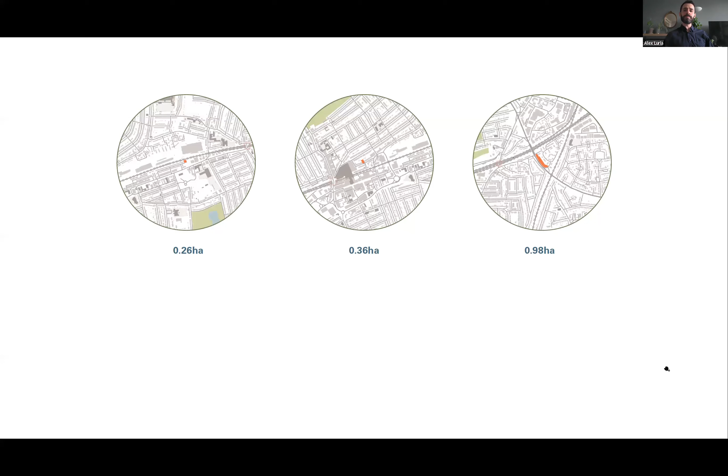So the next step was for us to identify 3 sites representative of the smallest scale, the medium scale, and the largest scale, and see what those sites could actually deliver. So we identified those sites, and then we worked up 3 examples as if they were real build projects.

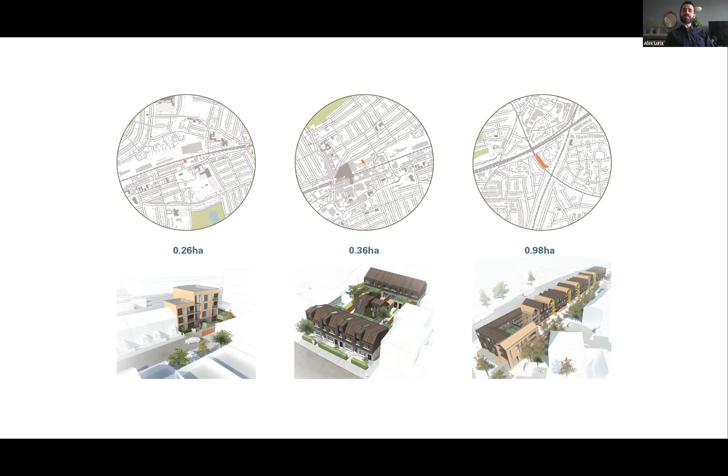With 3 different typologies to respond to the context: one flatted infill site, one which was back-to-back housing or terraced housing, and then another on the larger site - we're talking almost a hectare here, so not a small site - for again flatted development, but in a different format. And comparing that to what the Brownfield register, the site allocations, and the permission in principle would deliver on those sites.

So we're starting to see that actually the permission in principle isn't really relevant, because we can already start to break that limit on any of these sites. And when we get up to the larger sizes, we're talking multiples of 5, 6, up to 10 achievable levels of density compared to what the government has allowed.

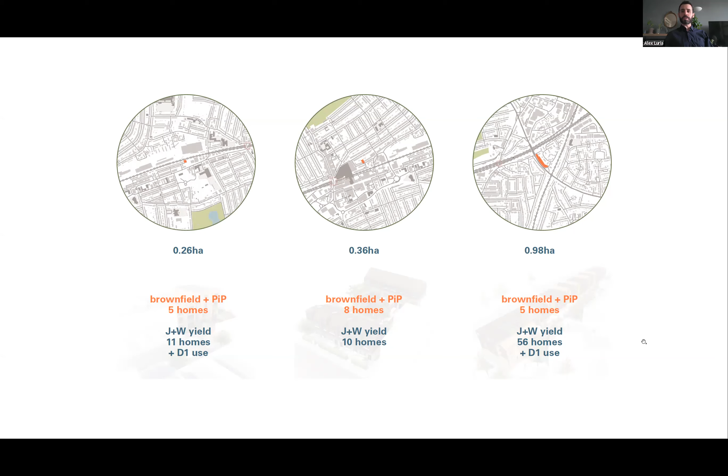What does that mean for a real world site? So the next thing I'd like to talk about is an example of a brownfield site which would have been on the register, which would have been allowable for permission in principle, and where we were able to achieve significant density increases, but in a manner which was both able to respect the scale of the context, the urban grain, the local community, and to also respect the natural environment.

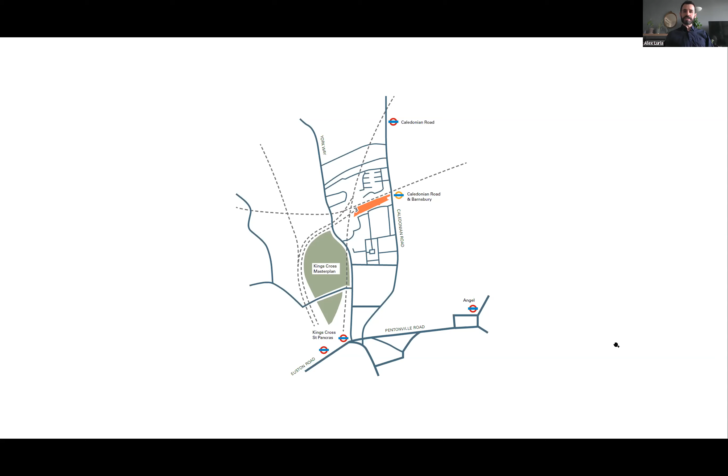So this is Caledonian Road in 2014. The site is just next to Caledonian Road and Barnsbury Station. It's just off the northeastern tip of the King's Cross Master Plan by Argent, and many of our contemporary architects have worked on that. It's the site of a former light industrial unit.

It is Brownfield Land. It was compulsory purchased by London Continental Railways to build the St Pancras Eurostar tunnel and link. So what you can see just where my mouse is hovering is that tunnel. They cut out and built the tunnel underneath this extent of the site and then filled over. So you can see here, that's the tunnel there. It buries into the site, and then the site was released and we worked on it.

So when you talk about brownfield sites, you're often talking about highly constrained sites because of their previous use. Often we have issues like existing below ground structures, contamination in the case of industrial land, overlooking to and by neighbouring development, lack of infrastructure existing and so on.

This site was no different. In fact, this was probably the most constrained site that we had ever come across. So I'll take you through a few of those. First, of course, we have the tunnel, which runs underneath the entire length of the site, the upper part of the site, at its minimum about 5 meters below the ground level.

Then we're bordering the site to the north and to the west. We have the London Overground and the King's Cross Main Line, and that's producing noises of about 75 decibels, about 2 meters from the site along this northern boundary.

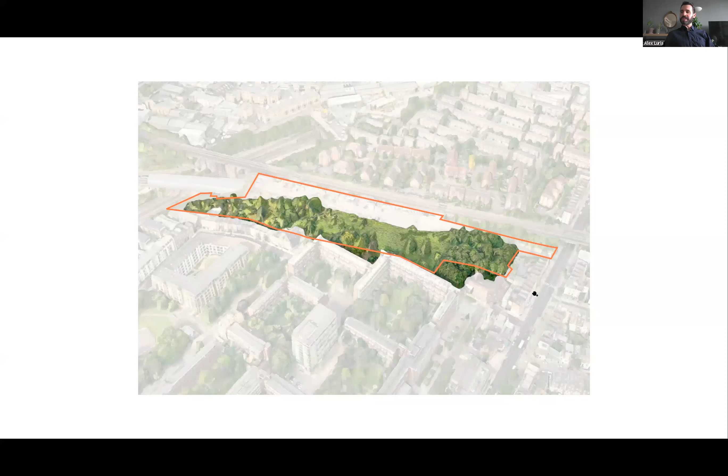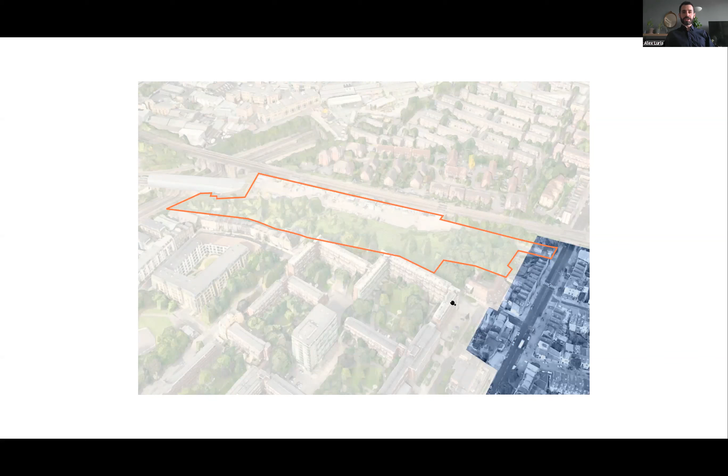A few more things. The site access - the site was completely landlocked except for one point of access from the east, Caledonian Road. We're in a conservation area. There's a river that runs underneath this part of the site, and it's also completely covered, or was also completely covered, with Japanese knotweed. So that was great.

So we have a heavily constrained site. The local authorities see this. It's both protected and infected, and we've got all kinds of existing problems with it. It's largely inaccessible. It's protected land, as I say. So they took this and they worked out a density achievable in their planning allocation of 35 dwellings per hectare. So our job is to take that and see what we can do with it.

So where we see a heavily constrained site, our job is to come up with layouts, passive design solutions, technological solutions, and building technology solutions to overcome those. Where it's largely inaccessible, our job is to open it up. Open it up not just for the people that use it, but also because that green space that we identified before, that's a community resource. Islington doesn't have much of that. Next, the protected land.

We have to find a way to sensitively develop in and around that land, but our goal was to actually achieve an overall net increase in the natural habitats and biodiversity. That's a net increase of area, not just intensifying the natural habitat. And we believed we could achieve a much higher density with those solutions.

I'll talk about how we managed to achieve that, but this is just a microcosm of how any site can be approached through the thinking of the architect and consideration of each factor. In this case, we dealt with the railway line by building a linear building along the north, carefully aligning all the primary residential spaces on the south. We were very lucky with the north-south facing site. All the ancillary and circulation spaces went to the north.

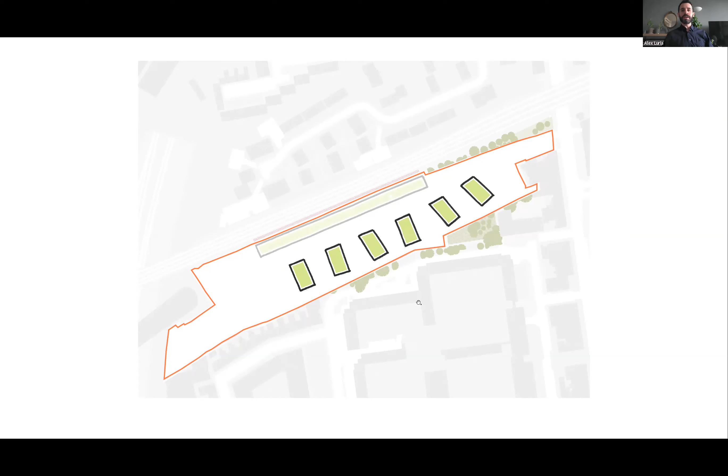By doing that, we were able to create a protective bubble of land within the site into which we could then place these pavilions. These pavilions have a compact layout and a tight footprint, and the goal of placing them into the land, partially incurring into the protected land, is that we can weave green space into and around, making sure we have little oases that are all connected, bringing even more green space to the north of the site, which was previously just tarmac. That's how we achieved an overall net increase in green space.

Secondly, by doing this, and having a scheme which is 100% dual aspect, we're creating and allowing every single home within this space to have a dual aspect view - a south facing view, and a view which penetrates through, bringing light in from the south, but also through to the site of importance for nature conservation, to that green space, to those trees.

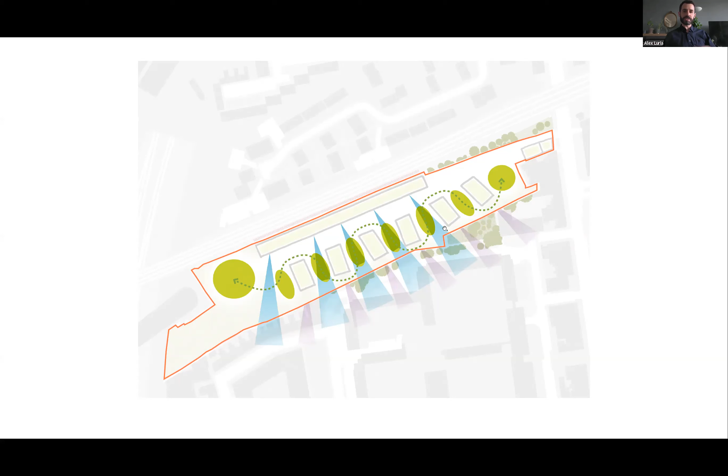And that's what we ended up with. In the end, there are a few more additions, like an end of terrace within the conservation area, and we terminated the street here so that we created, through the linear block, a very recognizable, legible urban grain.

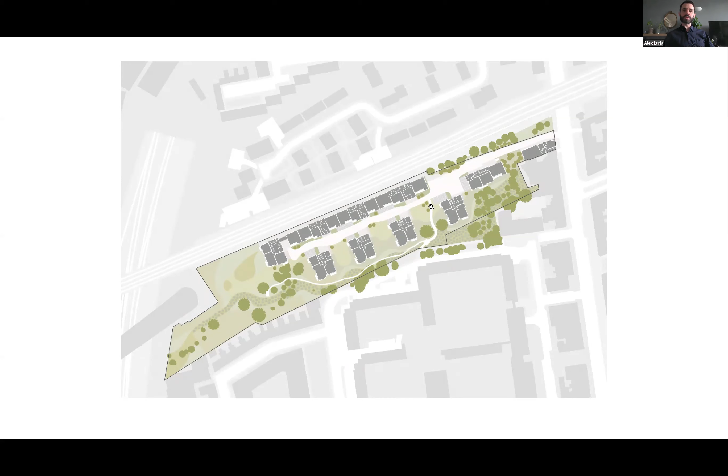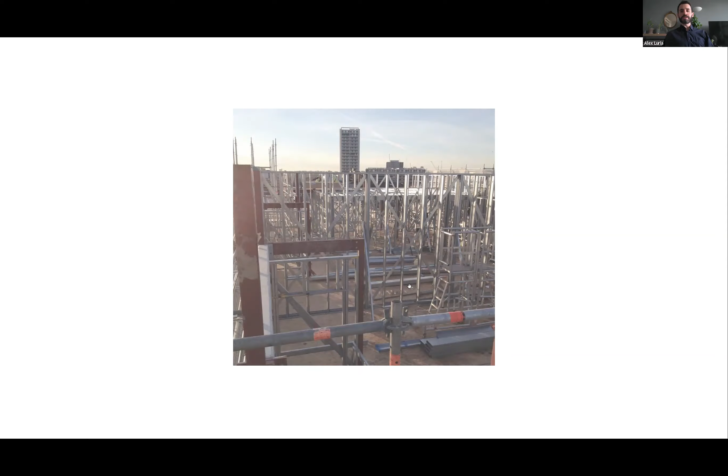The fines for doing so and putting the Eurostar out of action were astronomical. They were fined by the minute, by the way - hundreds of thousands of pounds per minute.

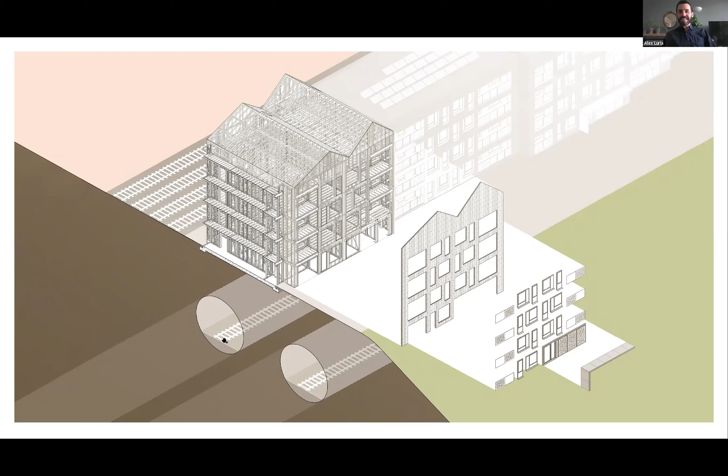So what did that leave us with? Well, it left us with a legible site, something that's amazing to be in, because when you walk down this street that's created, you keep getting these glimpses that open up and reveal light coming in from the south, but also reveal the green space we've created between the buildings.

So this is one of those gaps between buildings. We clad it partly in London stock brick, which is the local vernacular material for Islington, but also in this recycled fibre cement material called Ocoskin, which has its own lovely natural tactility but is 100% maintenance free.

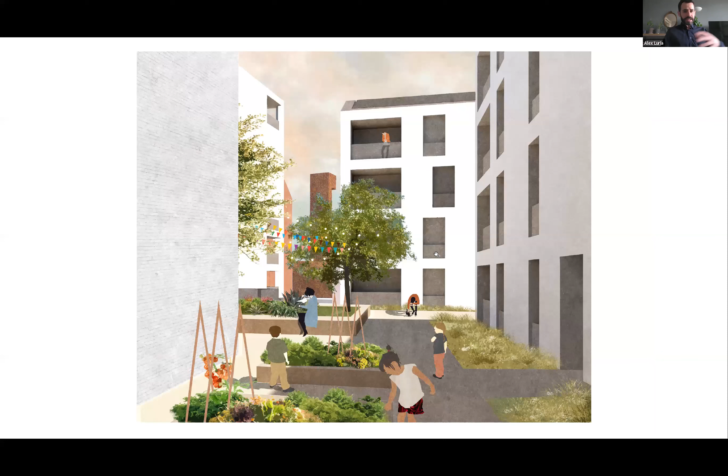One of the things we're finding in general in response to the pandemic - and of course you can't have a talk without mentioning the pandemic at the moment - is just that need for sanctuary and for green space. People are, for the most part, stuck in their homes.

So clients are now very wary of that and alive to it, talking about creating additional, above and beyond green space - not just what the nationally described space standards say, not just what the London Housing Design Guide used to say. We think it's definitely our responsibility as architects: if we have to build high density housing where people are elevated up into the air, you can't necessarily bring them to the ground, but you can bring the ground and nature up to them.

This is an example of one of our recent projects, just received planning permission in Hackney Wick, where we have allotments within the podium, within the amenity space. And how we managed to achieve that on Caledonian Road was, of course, through this opening up of the land, but also because of the way we're able to orientate and develop and manage the northern building, the linear block.

We're ending up with passive solar balconies that provide shading to the extensive southern sun, but they're also roughly double what the old London Housing Design Guide standards would have required for that external space.

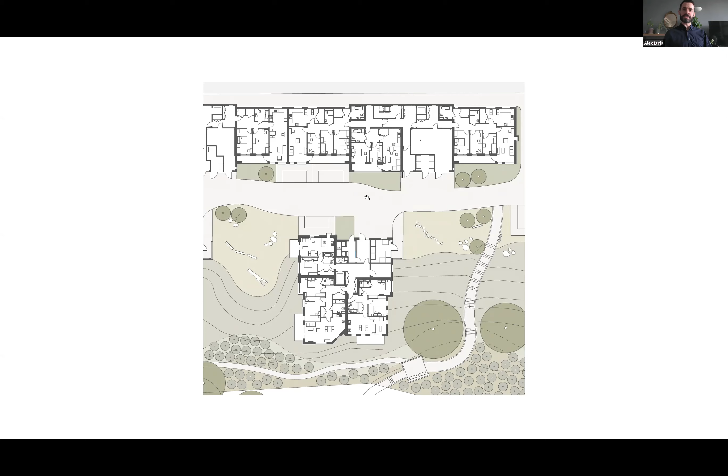And then the green space itself, we worked with Standerwick Land Design, our landscape architects, to plant it. There were 2,400 trees on this site. What's going to be amazing is that over the next 25 years and beyond, that forest will be managed, and we'll be able to revisit the site every year to see how it's developing, because when complete, it will account for 10% of Islington's entire forest space.

We were also careful to open it up to the public, so we brought in a nature walk and a bird hide within the space. Once you're within that space, we were careful to frame some views so that you could be there, within central London, in zone 1, and maybe sometimes you might not realize you're there at all.

So that's one example where we were able to increase the density. And of course, that's just one example, but cumulatively every project counts. The job of architects, the job of ourselves, and hopefully many of you watching, is to make sure that every single project counts when it comes to thinking and delivery of more homes.

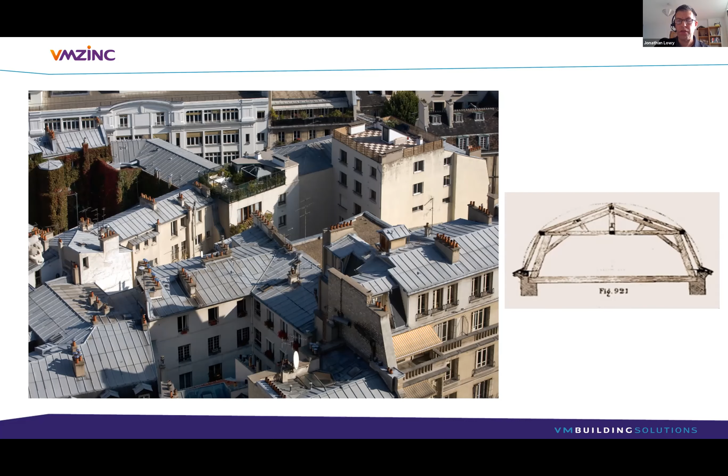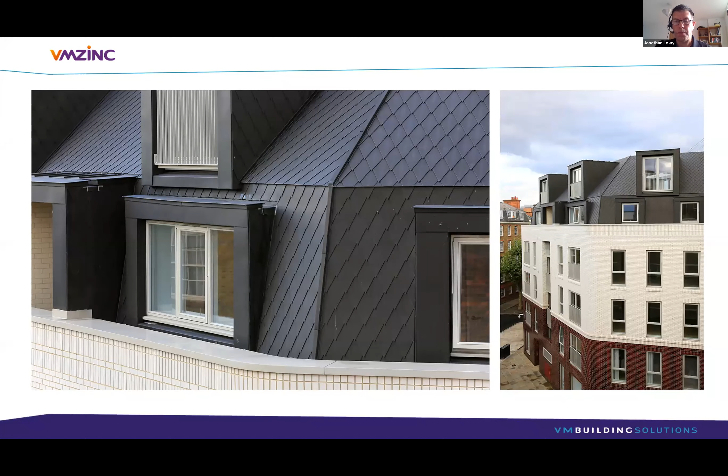But at quite a different scale, in Clerkenwell, a very mixed housing project done for the council, Matthew Lloyd Architects created this new project, which fits in with an Edwardian area of Clerkenwell. You've got the ceramic bricks with, at the top, the anthrazinc, so the dark zinc shingles - still zinc, but weathered to a dark anthra finish into shingles, and all those dormer windows and flashings are made from the same material. This project, actually, I don't have a photo here, but as Alex was saying earlier, there's an internal courtyard which gives space for the 75 units for people to get out and use a communal space, which is really well used.

Different country, back to Paris. Aubervilliers, which is a suburb of Paris, a fairly working class area. This is also a mixed use building, but with quite a lot of low income housing, 61 units. This is called the Craft Building.

But there's also an interior space again, where people can get out but be within their residence.

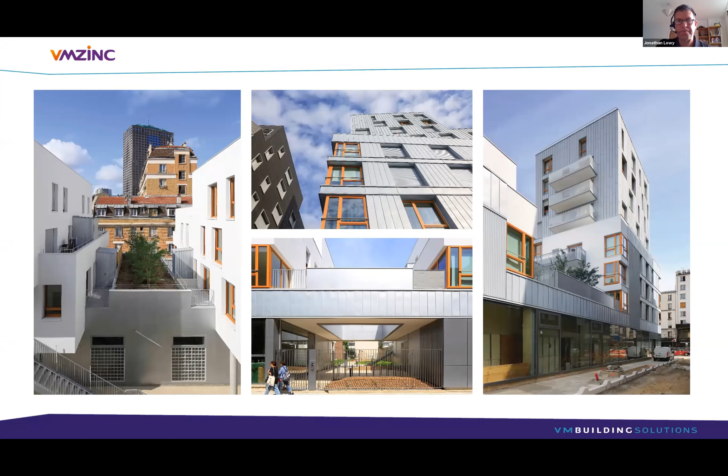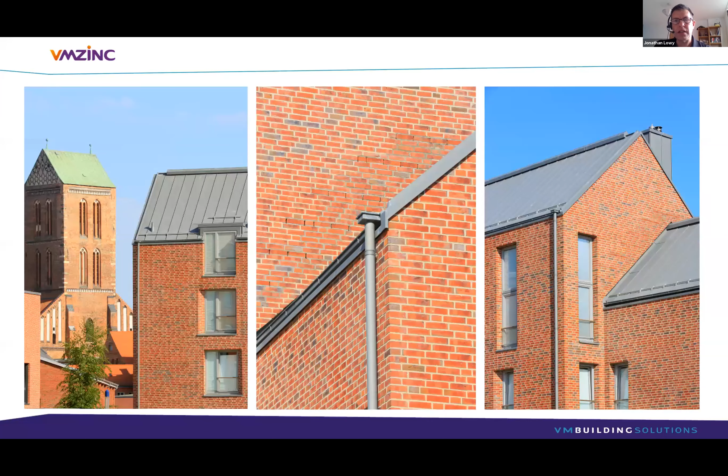Back in Europe, there's a theme appearing here, another brownfield site, where Stark and Partners connected two neighborhoods of the port of Wismar using this new development. It's now become a UNESCO World Heritage Site, and this area is housing, but it's also shops and bars. I think from a materiality aspect, the quartz zinc here really works well with the brickwork. They really go together in a harmonious way.